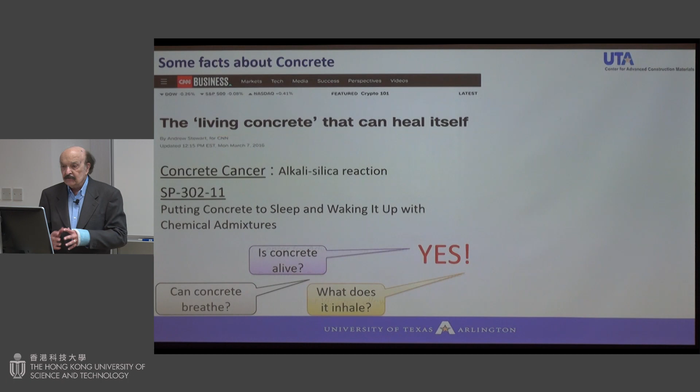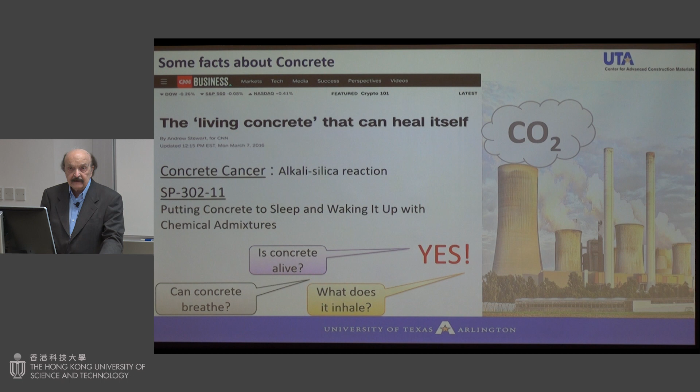the subject of my talk. We know that CO2 emission is a big issue for many industrial processes. And if concrete can breathe CO2, then we can reduce CO2 and help with climate change. So that's what I want to talk about: how can we accelerate breathing CO2 by concrete?

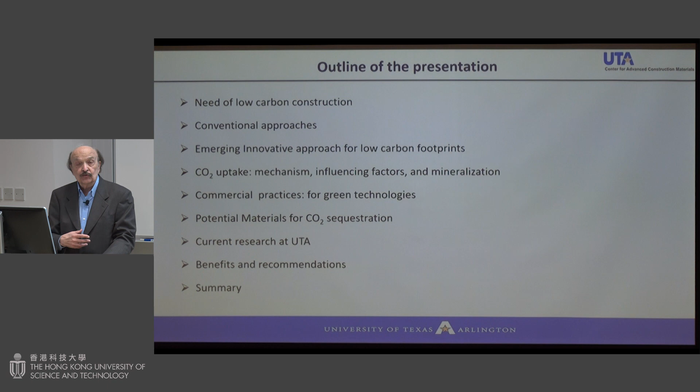So that's an outline of my talk. I'm going to talk about why we need low carbon construction, conventional approaches, and then I want to emphasize new innovative approaches, some mechanisms of carbon dioxide sequestration, mineralization, some commercial practice, and what materials—how we can manipulate composition so we can absorb more CO2 in a shorter time. That's essentially what I'm going to talk about.

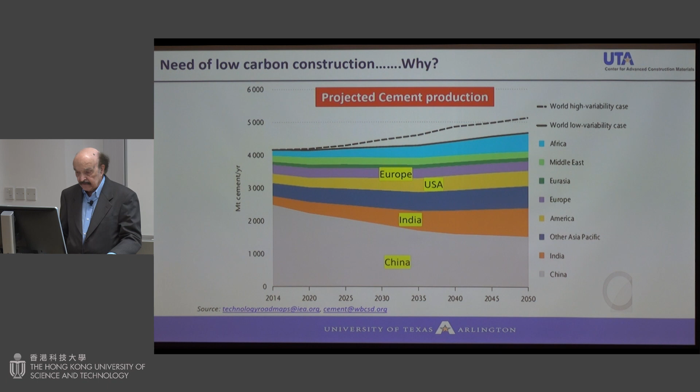I think we all know that as a result of increasing urbanization, especially in developing countries, Africa and India, we will need more and more concrete and more cement. If you look at the projection of cement production worldwide in 2050, it could be as much as 5 billion tons. That's a lot of cement. What we want to do is that we will need more concrete, but can we do it in a sustainable way? That's really all. Many people are working on that.

We know that most of us are familiar with the fact that concrete production has many issues like production of any material. Before cement production, there are pre-production steps such as quarrying and grinding that take energy. After cement clinkering, we have grinding also. But the main emphasis now is so-called clinkering. When you have calcination of limestone, you have CO2 emission. People say that CO2 emission during cement production could be as much as 6 to 8% of total CO2 emission. So it's a major issue, and a lot of people are working on it.

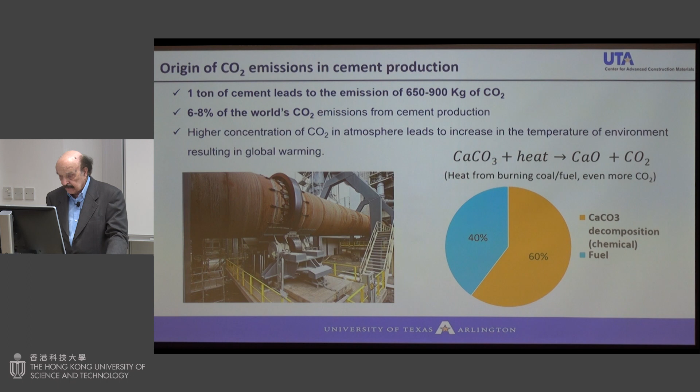So there are already many successful conventional approaches to replace cement. For example, one is we all know that we use fly ash to replace cement.

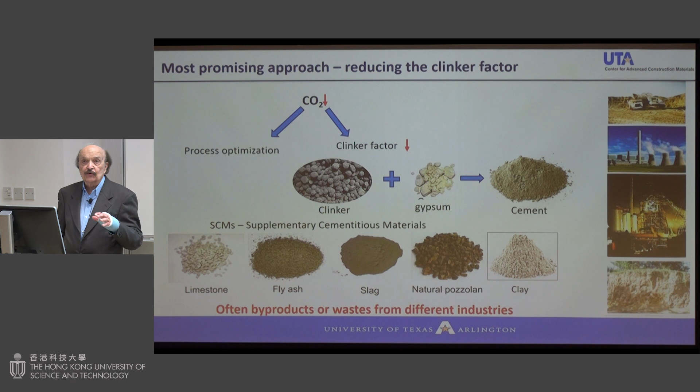Some of these are obviously successful, but there are issues. For example, fly ash will be available less and less as we move toward renewable energy and use less coal for generating electricity. Some additives, such as large amounts of fly ash, delay hydration.

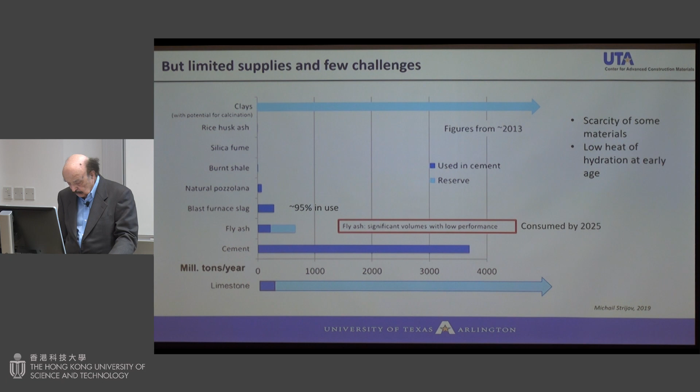So I want to talk about an alternative approach. Recently, people have analyzed the ways to reduce CO2. If you look at CO2 capture, thermal energy and fuel switching during the production of clinkering is one approach. I mentioned reduction in clinker, but the large new approach is innovative technology, and they have calculated that as much as 50% reduction of CO2 can come from using innovative technology.

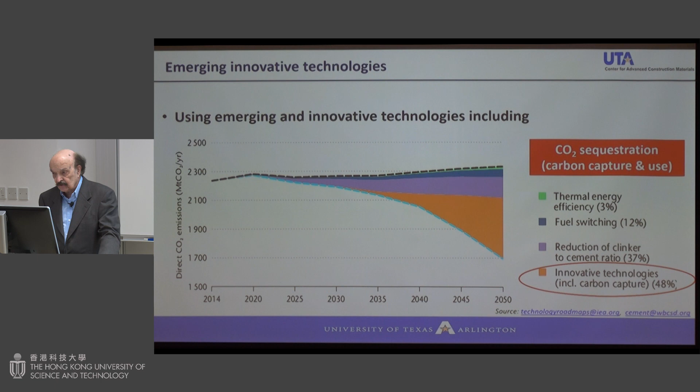So what I'm talking about is CO2 sequestration. CO2 is generated not only by cement, but by automobiles, energy, and many other industries. A lot of work has been done on capturing and storing CO2 underground in rock formations. We're talking about not only capturing it, but using it to make a useful product.

That's what we call carbon curing. Carbon curing, as I will show you, develops strength and makes a useful product.

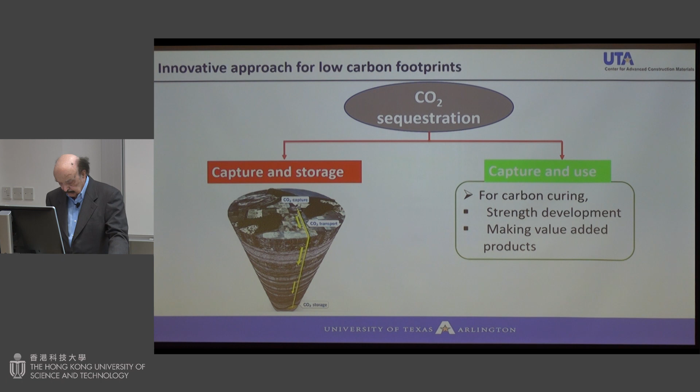What is the breathing mechanism? If you look at the surface of the concrete, you have CO2 in the atmosphere, and that CO2 combines with water to form carbonic acid, which combines with calcium hydroxide to give us calcium carbonate. Calcium carbonate is what we talk about in carbonation.

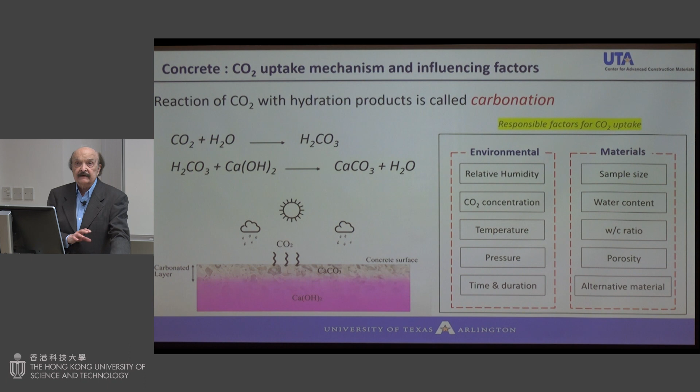How much CO2 can be absorbed depends on many factors. I've listed environmental factors here: relative humidity, how much CO2 is in the atmosphere, temperature, pressure, and how long we cure it. The material also plays an important role - how much water content you have, porosity, since CO2 diffuses, and what alternative material you can use. That's what I'm also going to talk about.

Many of you know that naturally exposed concrete will absorb CO2, and we call this carbonation. In fact, carbonation is considered harmful, although it takes a long time. Because of carbonation, you can have decalcification of CSH, which is not a good idea. Also, if the pH is reduced, you have an issue with corrosion of reinforcing bar, which is one of the major issues, for example, in the workshop we'll attend this weekend.

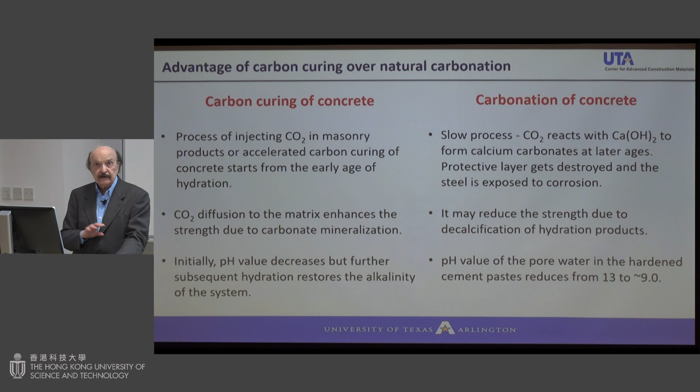Now, carbon curing is different from carbonation. You do it at a very early age. The diffusion of CO2 enhances mineralization, making the material strong. Although the pH value may go down initially, alkalinity may be restored afterward. So the issues of carbon curing are different than those of carbonation.

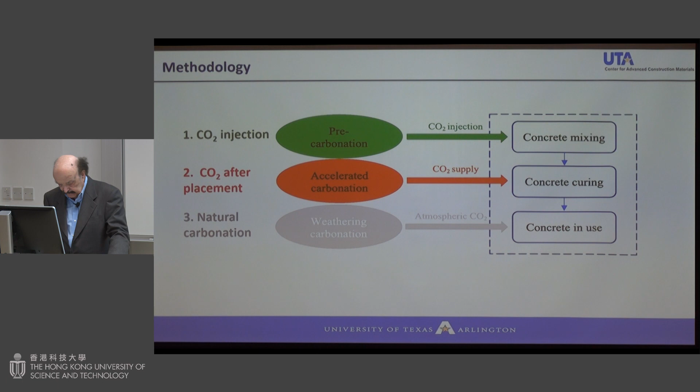There are many ways you can inject CO2 - people have tried during mixing or after placement, which is what we call carbon curing, and I'm going to emphasize this more, as well as natural carbonation that I mentioned already.

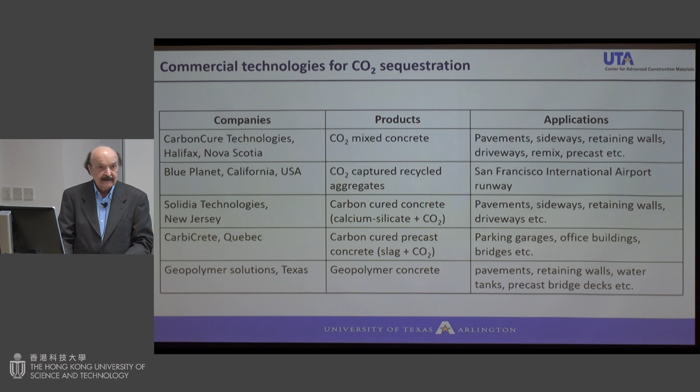Already many people are working on this CO2 sequestration, and I've listed some of them here. Perhaps one of the more interesting is the Solidia technology, which is now being supported by a large company called Lafarge. I'll talk a little later about calcium silicate and then using CO2. There's more and more emphasis on CO2. I don't know about Hong Kong, but here CO2 curing has become very popular - even Bill Gates mentioned on CNN that that's the way to go.

When you have calcium carbonate, formed from CO2 and calcium hydroxide, it has different polymorphs. The most common is calcite, but there's also vaterite - thermodynamically less stable than calcite. Similarly, there's aragonite and amorphous calcium carbonate. Like many amorphous materials, if you can stabilize amorphous calcium carbonate, you get a much stronger response than calcite, vaterite, or aragonite. One of my colleagues, Warda Ashraf - I don't know if I have a slide - is adding, for example, biopolymer.

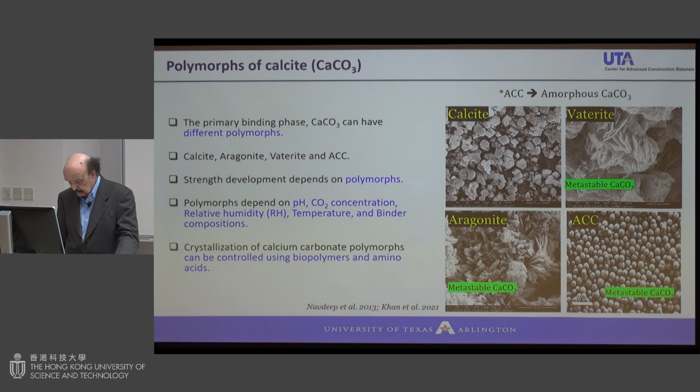She's adding biopolymer to stabilize amorphous calcium carbonate. A small amount of dopamine and amino acid can stabilize amorphous calcium carbonate, making materials much stronger. I'll show you one slide on this. So what are the different materials people have tried to help accelerate CO2 sequestration?

Wollastonite, I mentioned, this is the company Lafarge and Solidia, and that's CS, calcium silicate. Fly ash certainly, especially high calcium fly ash, which is not normally preferred as a pozzolanic material, but it's very good for carbonation. Red mud, I'll talk a bit about it. Recycled cement paste, recycled concrete aggregate, and then finally some very recent work we have done with nanomaterials.

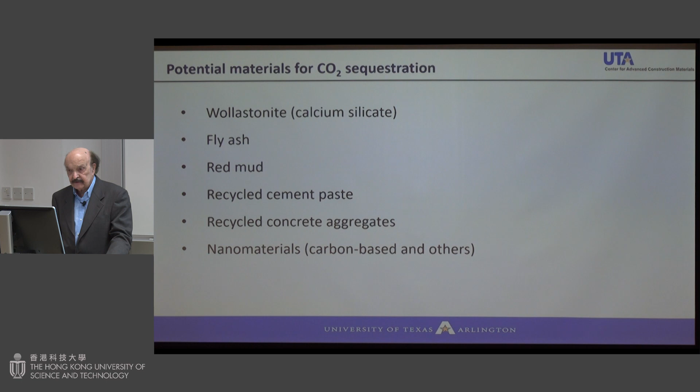So there are a couple of things I want to mention. We're all familiar with C3S and C2S. When we add water, we get CSH, and CSH is what we want. With calcium silicate, such as wollastonite, if you have water, nothing happens - it's not a hydraulic material. But with CO2, you produce calcium carbonate and calcium silica gel. But there are two things here.

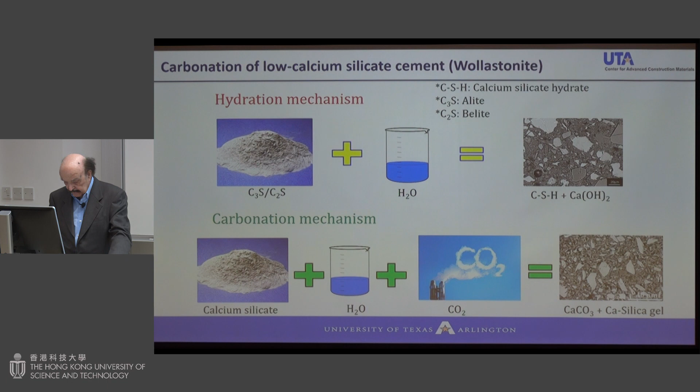This is where the real innovations come. One, I mentioned that you can manipulate the polymorph of calcium carbonate. What's also important is this calcium silica gel can act, after carbonation, as a pozzolanic material, which I'll show you examples of. So that's quite interesting - the strength is given by both calcium carbonate and calcium silica gel, and you can control and manipulate that. A lot of research needs to be done there.

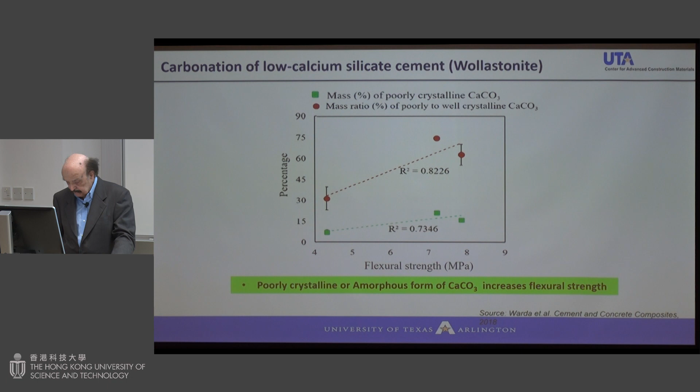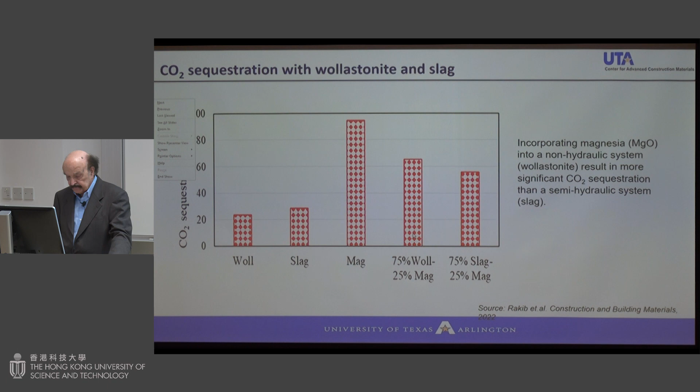There are other ways you can manipulate the polymorph of calcium carbonate. Another way is, for example, adding slag. So here you have how much CO2 you can sequester with wollastonite, which I already showed you. But then if you add slag alone, because it has a high amount of calcium - many people are now working on MgO, or magnesia. But when you combine wollastonite with magnesia, incorporating MgO in this non-hydraulic system can also increase carbon sequestration. So these are some of the ideas.

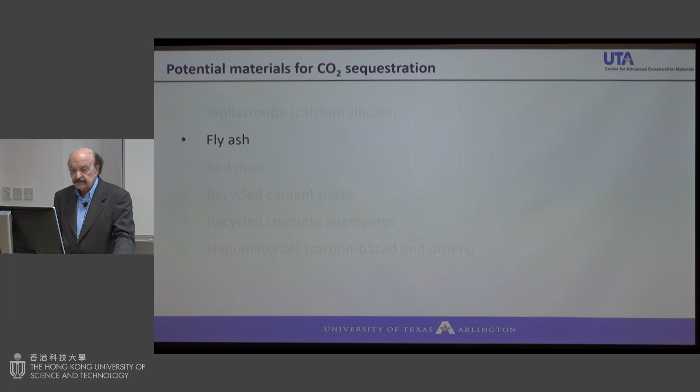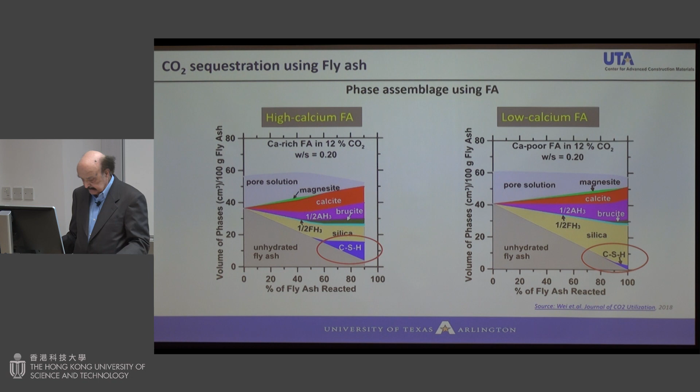So now we talked about wollastonite, which is commercialized, and how we can manipulate it to increase amorphous content. Fly ash - most of the time when we use pozzolanic material we're talking about low calcium fly ash, often called class F in the US. High calcium fly ash is normally not preferred because of high CaO, calcium oxide. But for carbonation, if you have low calcium, then that calcium is used up by carbonation, and as a result the pozzolanic reaction is less, giving only a small amount of CSH - not preferred for carbonation. So for carbonation we prefer high calcium, because there's enough calcium for both carbonation and the pozzolanic reaction.

Red mud comes from waste material of alumina production. Professor Lee, the Jinan people, tell me that Shandong has a large amount of waste red mud, and in the US, in the western part, there's also a lot. So what do you do with this red mud as a waste material? This is work done at Hunan University. Red mud contains lime, silica, and alumina.

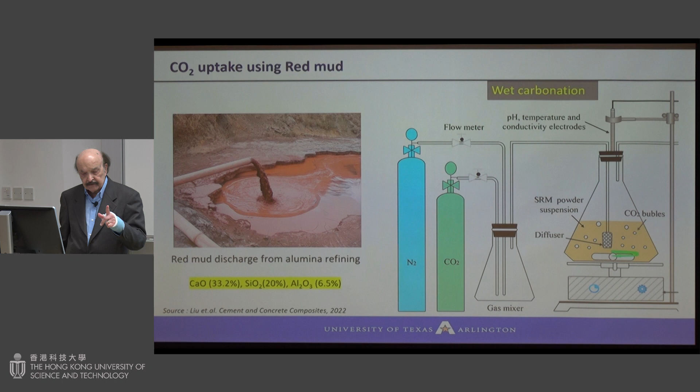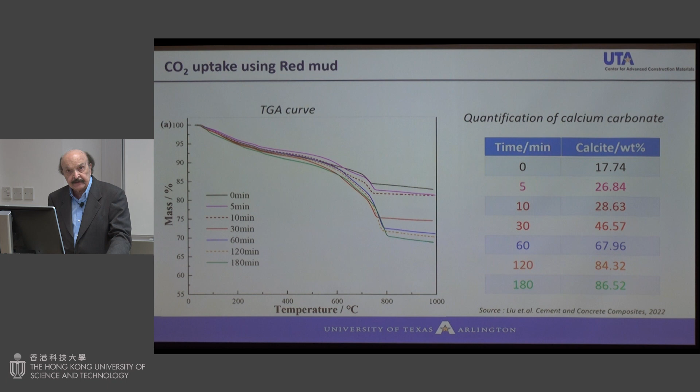So what is done is you carbonate red mud - this is wet carbonation, then dry it and use it as a powder. For example, shown on the right, calcium carbonate forms over time with CO2 - I think it was 20% - and as more time passes, at about 3 hours you have quite a bit of red mud converted into calcite. Then after 3 hours of curing, they add different amounts to replace cement.

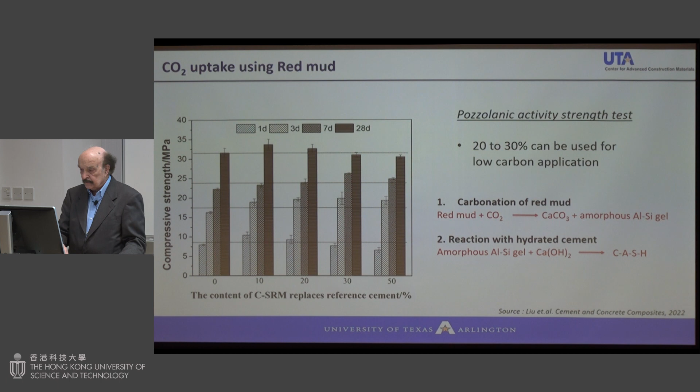You are using waste material, which is a good thing. And obviously there is a cost involved, but the benefits far outweigh the cost.

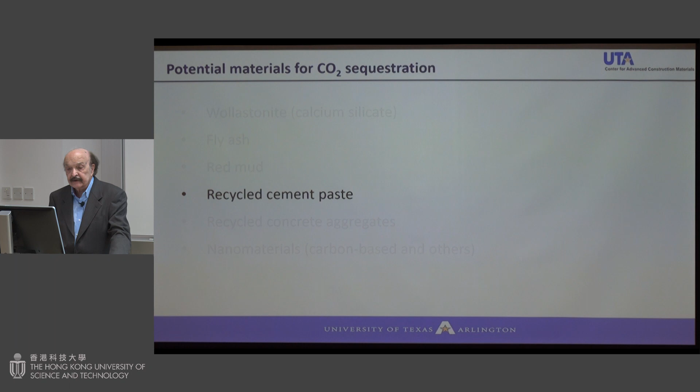Now people have been doing work, quite a bit also done by Prof. C.S. Poon at Hong Kong Poly, and I'm talking about his work on recycled aggregate in a minute. But let's talk about recycled cement paste.

We all know that concrete waste, whether after demolition, after an earthquake, or after the ready-mix truck comes back and is cleaned, there is a lot of concrete that can be recycled. Currently recycled concrete aggregate is really not used for structural concrete, because when you crush it, it has a thin layer of mortar which is very porous. It absorbs a lot of water, and as a result, when you replace natural aggregate with recycled aggregate, you can control the strength, but durability because of this weak interface is a big issue.

So people are trying various ways to make recycled aggregate more like natural aggregate. What are the various ways? Well, carbonation, which is the topic of our talk, but people have also used microwave to remove this layer, or heat treatment. People are using, for example at IIT Madras, solar energy to remove it.

We have done work using nanosilica - if you submerge recycled aggregate in a slurry with nanosilica, the nanosilica will react with the calcium hydroxide in the porosity, and you essentially get a surface which is close to natural aggregate. You can also use biomineralization, such as using bacteria.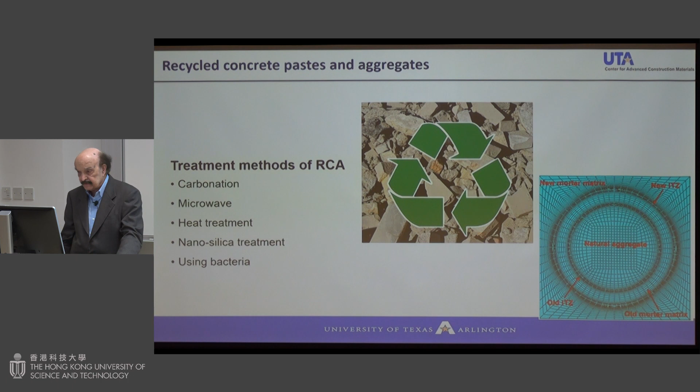The nanosilica work I have done myself. I'm not going to talk about it here - folks at Tongji University as well as in Zhejiang have done work using bacteria. But what we are talking about is: if you remove the cement, then you have recycled paste.

If you take recycled paste and carbonate it, then you get what we call carbonated recycled paste, and this is work done with both type 1 and type 3 cement. So you remove the cement from recycled aggregate, carbonate it, and it turns out that this carbonated cement paste is actually a pozzolanic material.

So here, if you look at the Portlandite, you take this along with calcium hydroxide - so calcium hydroxide and fly ash, which is a pozzolanic material, versus calcium hydroxide and recycled paste. You get much more calcium carbonate, more pozzolanic than fly ash. Very interesting - the mechanism is calcium carbonate plus amorphous silica gel.

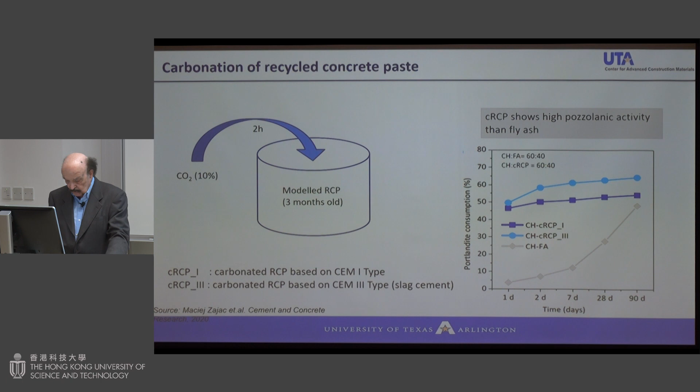I mentioned that we often try to replace cement with limestone. But if you replace cement with limestone without any pozzolanic material, you obviously reduce the strength to some degree. Now, in addition to limestone, we have added recycled paste. Comparing with limestone alone: control, addition of limestone, and limestone plus recycled paste - you have increased compressive strength quite a bit because of the pozzolanic activity.

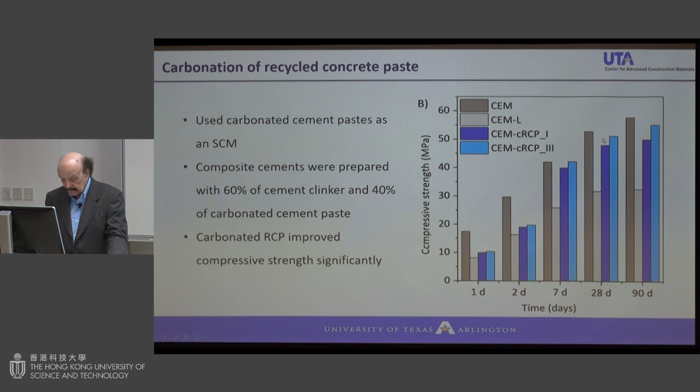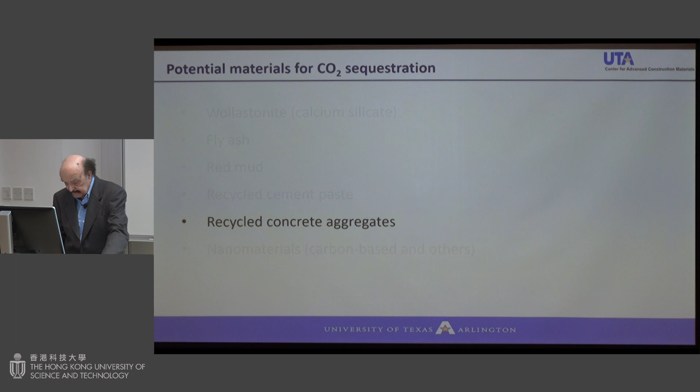So now the interesting work I mentioned - a lot of people are working on recycled aggregate, with coarse aggregate and also very fine aggregate. Now fine aggregate works in a very interesting way for carbonation.

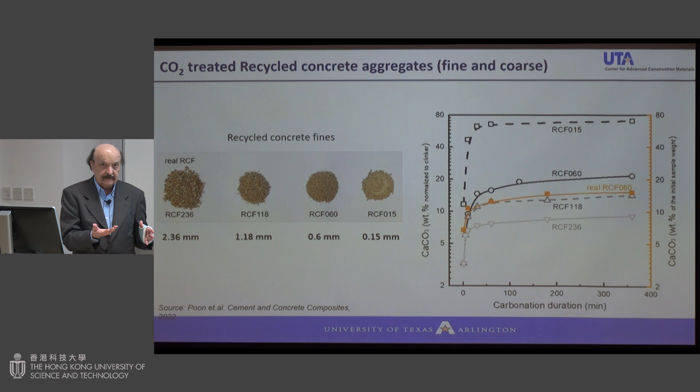This is carbonation of recycled fine aggregate of different diameters, from 2.36 millimeters down to as small as 0.15 millimeters. Looking at carbonation duration and amount of calcium carbonate, clearly the smallest size gives the highest calcium carbonate because you have a large surface area, which is understandable. But if you look at the smallest size, 0.15 millimeters and smaller, after carbonation you have calcium carbonate and silica gel, which acts as a pozzolanic material.

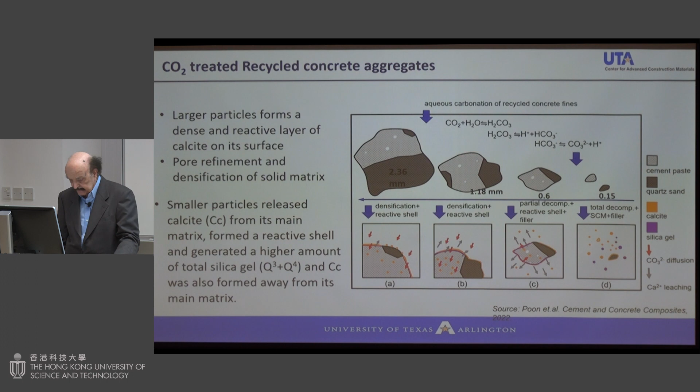So with coarse aggregate, carbonation forms a nice layer of calcium carbonate. But with very fine aggregate, you get calcium carbonate as well as silica gel, which acts as a pozzolanic material. This is some work done in Japan.

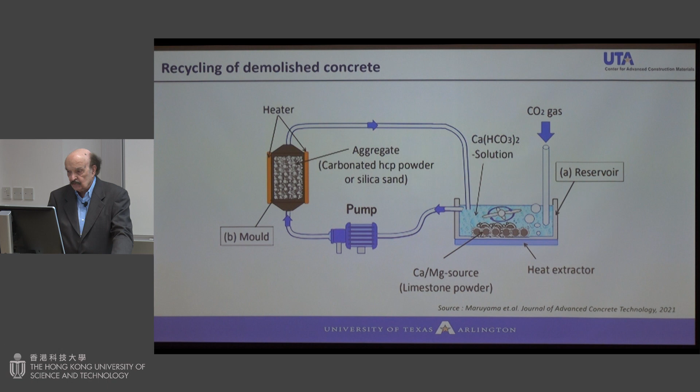A lot of people ask: you have construction waste, what do you do? Well, one way to solidify it is to take construction waste, whatever it is, and add a source of calcium or magnesium, then carbonate it into a solid. For example, they did this with just sand particles as waste, carbonated it with the addition of a calcium source, and got a solid material.

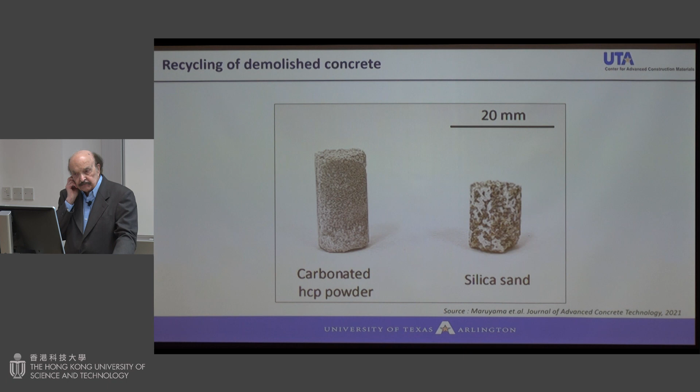Carbonation is playing a big role in a variety of ways.

Now finally I'm going to talk about nanomaterials. Yesterday I talked with a few people and they asked how I get new ideas in research. I don't know, people have different ideas, maybe Professor Lang and Zhongxin have their own, but I want to give you one example of how I got this new idea.

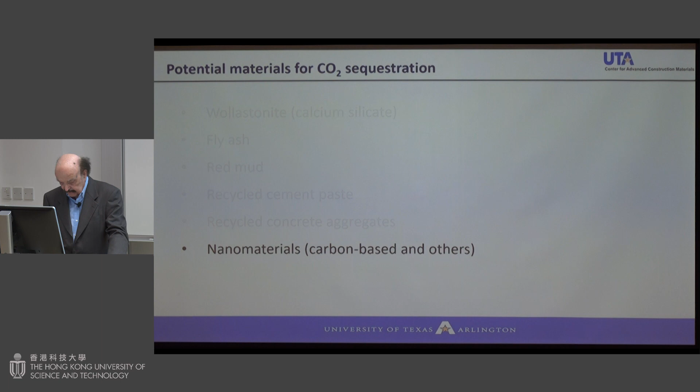I was looking at a study done at Purdue University. They have been working with nano-titanium dioxide. Many of you know we use nano-titanium dioxide because of its photocatalytic activity, so you get a so-called self-cleaning surface. It's available as an admixture.

What they found is that when you take from 0 to 2% nano-titanium dioxide added to cement and carbonate it, there's an effect similar to addition of nanosilica on compressive strength. Up to about 1%, non-carbonated, compressive strength increases, and people attribute that to the nucleation effect on hydration of the nanoparticle.

But now when you carbonate it, you can see that with an addition of 0.5%, you increase quite a bit the compressive strength compared to control.

And if you look at the CO2 uptake, or CH consumption, it increases up to about 1%. Now why does titanium dioxide after carbonation increase CO2 uptake?

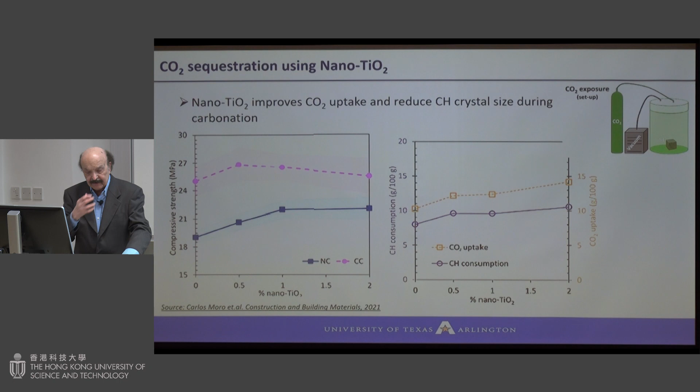So I said, if it reduces the size of the calcium hydroxide crystal, why not see whether it also increases the CO2 uptake? That's how I said, okay, it's worth a try. That's how we started doing work on GO.

Here, for example, is some work done by Chen, Wang and others, where we measured crystal size - calcium hydroxide crystal size - which you can calculate from XRD. You can see here that the addition of GO, in this case 0.04%, a small amount, results in a reduction of calcium hydroxide crystal.

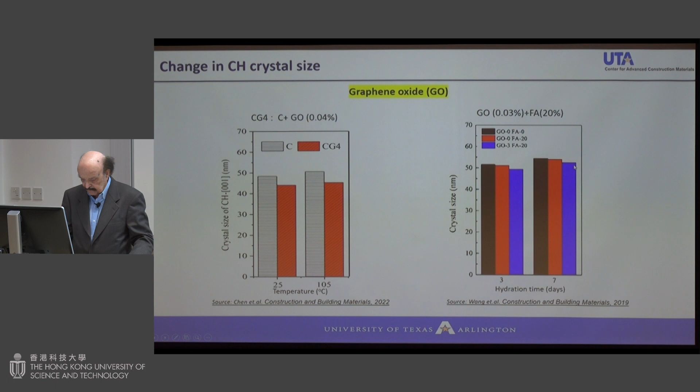So we decided to take GO - I think many of you are familiar with graphene-based materials. Everybody wants to use graphene, but graphene might be difficult to disperse. So you have this GO, which is functionalized - oxygen functionalized - and that's easier to disperse. That's different from CNT, which I'll talk about a little bit.

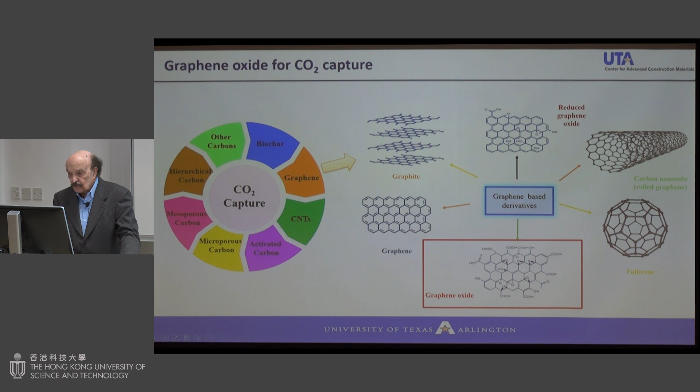So we took GO - this was work done at UTA, which we just published - mixed with water, then shear mixing and ultrasonication, so you have a solution of dispersed GO. With graphene oxide we're talking about a very small amount, about 0.1%. Then we add cement, make a specimen, and do CO2 curing.

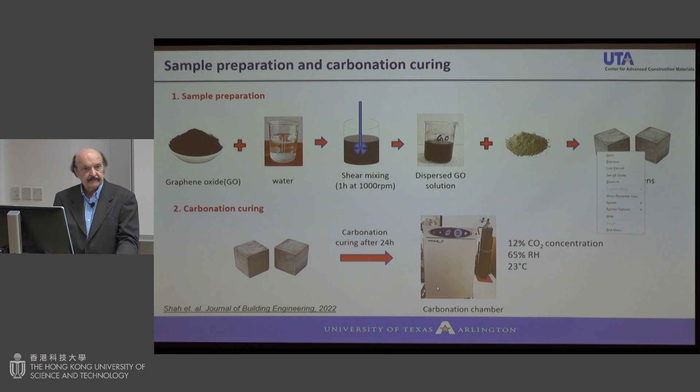When you do that, here is the compressive strength: control specimen, adding GO at 0.05% by weight, a very small amount, and 0.1%. As I mentioned earlier, addition of GO increases compressive strength, and one of a couple of reasons was the reduction in calcium hydroxide.

After carbonation - this is control - you can see that compressive strength increased quite a bit with the addition of GO. Same thing at 28 days. Of course, the more important result is at the earlier 7-day curing.

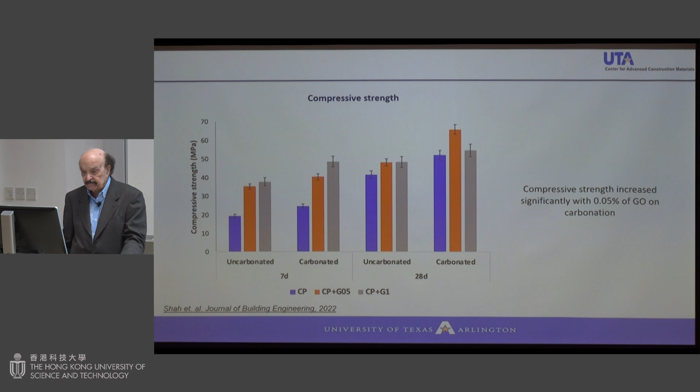I'll talk about a few other additions later on. I think this is very interesting work, and as far as I know, it's the first time we showed that addition of graphene-based material can increase CO2 uptake.

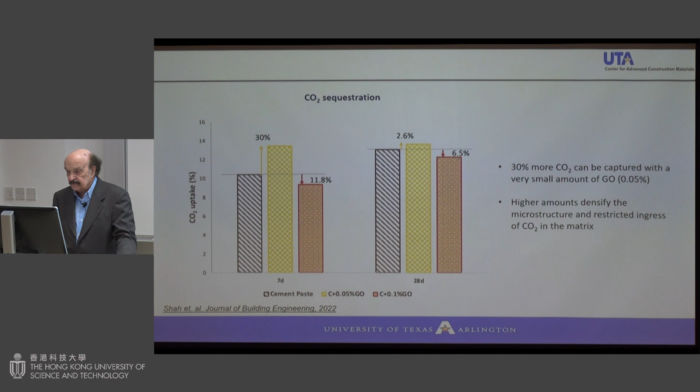One reason, as I mentioned, is for GO the calcium hydroxide effect, but also because of this functionalization with oxygen - this is also true whether you mix CNT, graphene, or GO. The layering especially depends upon how you are dispersing it, but if you are dispersing with superplasticizer as we are doing, then you have calcium ions attached to the surface, which helps in CO2 uptake.

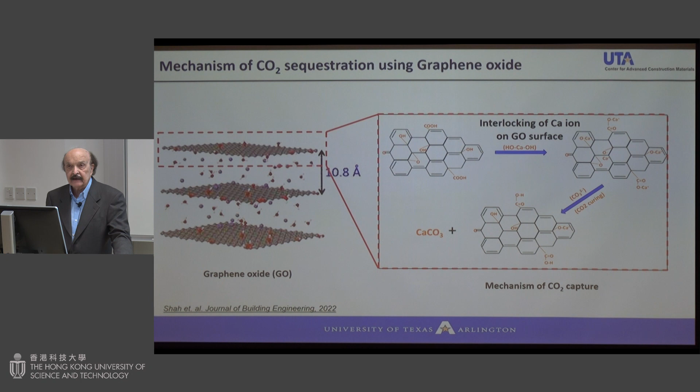So what is the next step? We saw results with graphene oxide. Now we want to try with carbon nanotube and cellulose nanofiber. Why carbon nanotube? Well, compared to GO, it has a much higher modulus and higher electrical conductivity. And why cellulose fibers? They are natural and more available compared to, for example, carbon nanotube. So we want to try those.

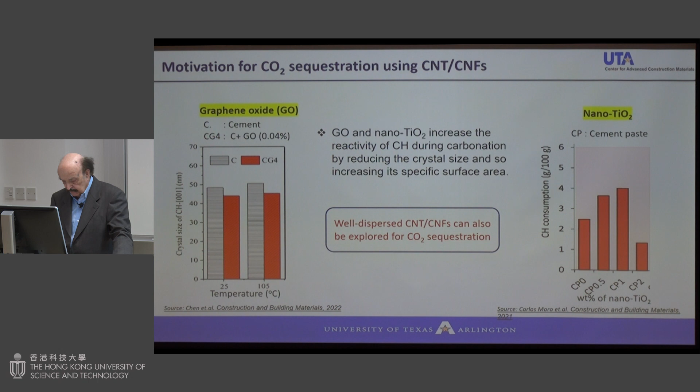That's the next direction. I want to talk about why we are interested in seeing whether carbon nanotube can also increase CO2 sequestration, because addition of carbon nanotube has many other advantages. I think we've talked about this before.

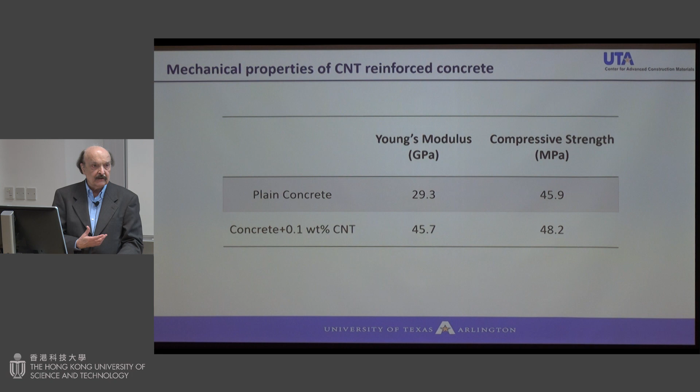For example, here I've shown 0.1% carbon nanotube for concrete and measured Young's modulus. Plain concrete has a modulus of 30 gigapascal, and with 0.1% carbon nanotube you substantially increase the modulus. This is useful in many applications. We had done a lot of work earlier, Zhongxin had worked on this for super tall buildings, where you need a high modulus, and one way is this carbon nanotube.

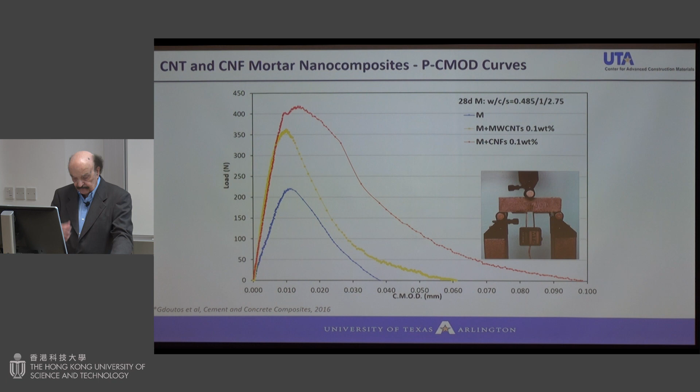We also find, for example, again with 0.1%, here is a fracture test - plain mortar versus 0.1% carbon nanofibers - and you more or less double the flexural strength. So this is why we are interested in seeing what CNT can do.

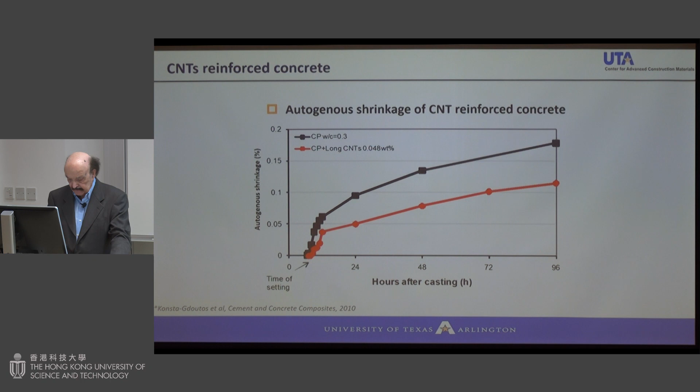Also very interesting: with high performance concrete using a low water-to-cement ratio, you have an issue of autogenous shrinkage. Addition of CNT, even a very small amount like 0.048%, reduces it. So with all these other advantages of CNT, we are now testing whether CNT can substantially increase sequestration, and we are also adding high calcium fly ash to add more waste material.

Many of you are familiar with what happens with CNT at the interface - you find there is more so-called high density CSH when you have this graphene-based material.

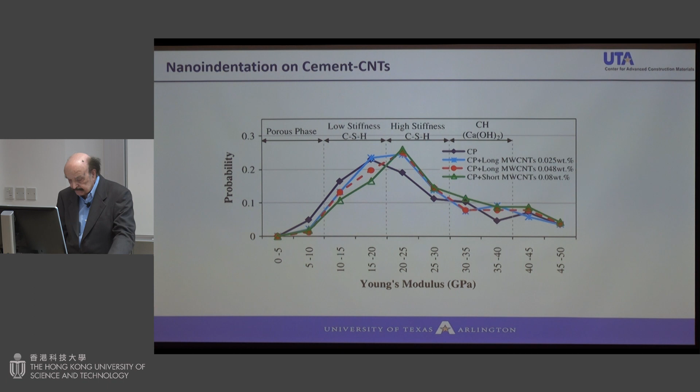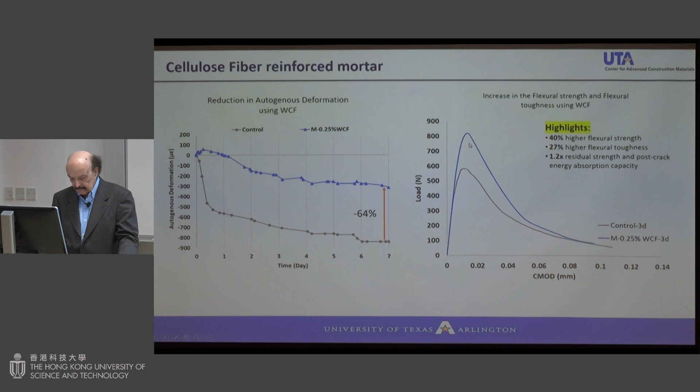So we are also working on waste cellulose fiber. I mention this because Jishu here is working also on natural fibers - these are waste cellulose coming from the paper industry. You can see, for example, his results on autogenous shrinkage comparing control versus a small amount of waste cellulose fiber, and similarly the load versus CMOD curve, control versus with cellulose fiber.

We think the cellulose fiber can also help with carbonation. If you look at the natural fiber, you have this cavity - I saw this yesterday with sisal fiber - and then with CO2 you can fill up this cavity and get a very dense material.

As you know, with natural fiber there is an issue with respect to lignin, and normally you remove that with treatment. But here, with CO2 treatment, you don't have to worry about removing the lignin.

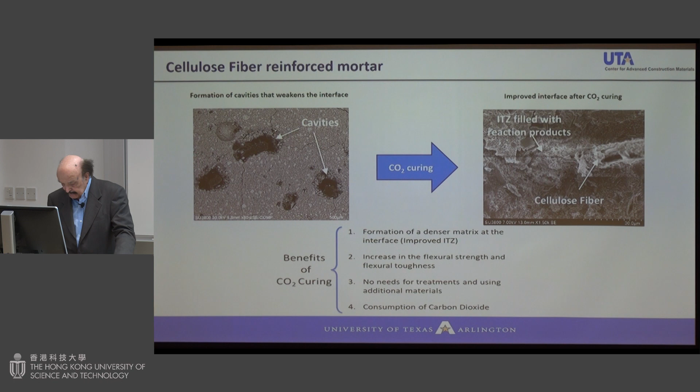As a matter of fact, this is not necessarily new. A long time ago, many of you are familiar with cement board, made with the so-called Hatschek process started in Austria. In Germany, they used wood fiber, cement, and then CO2 curing, the idea being the same - getting rid of the harmful effect. So there are a lot of interesting things we can do with both carbon nanotube and cellulose fiber.

So I want to conclude with some work we have been doing with biochar. Many of you are familiar with biochar - you have agricultural waste, often you burn it and it produces CO2, and in countries like India, agricultural burning causes a big pollution problem. However, if you heat it so that oxygen doesn't enter, what you get is essentially carbon, a carbon negative biochar. It's a very porous material, a waste material, coming from different agricultural sources.

For example, in Italy they drink a lot of coffee, so coffee bean is a source of biochar. Biochar is a very porous material, and when you add it to concrete, strength can go down, but there are other advantages, like acting as a curing agent and having low thermal conductivity. But we said, how about carbon sequestration? We want to add biochar clearly without sacrificing other properties.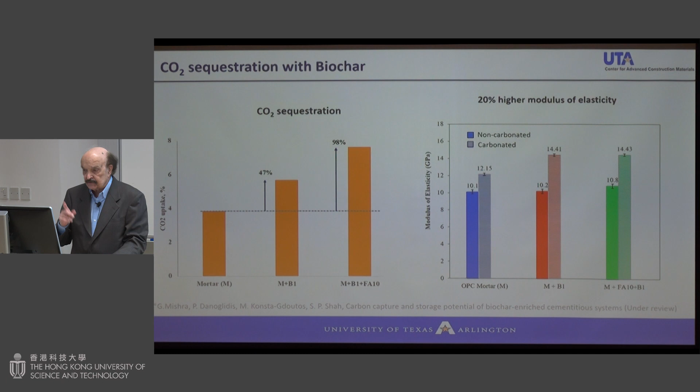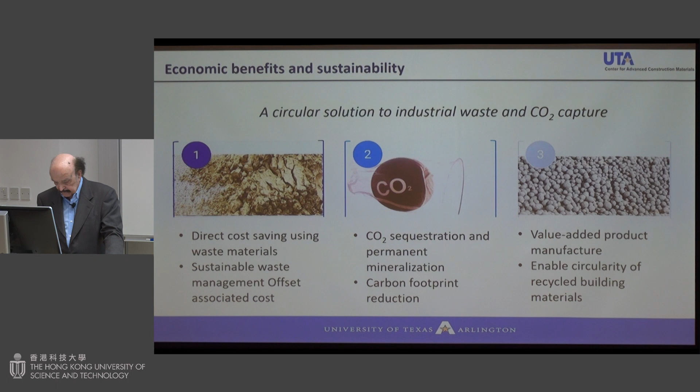I hope I gave you some ideas about what's happening as far as helping climate change by absorbing CO2. And when you take waste materials such as fly ash, recycled aggregate, and red mud, it's really a circular economy, and that's the advantage of this kind of work. So I'll conclude my presentation.

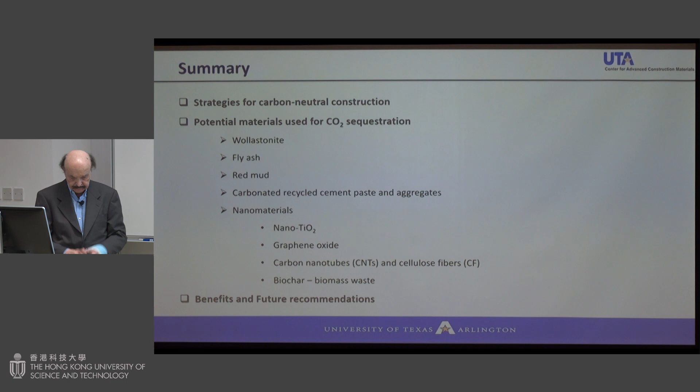Just to summarize, we talked about wollastonite and how we can control the polymorph, fly ash, red mud becoming an interesting pozzolanic material, the same with recycled aggregate, and then we talked about some of the nanomaterials. So that's the end of my presentation.